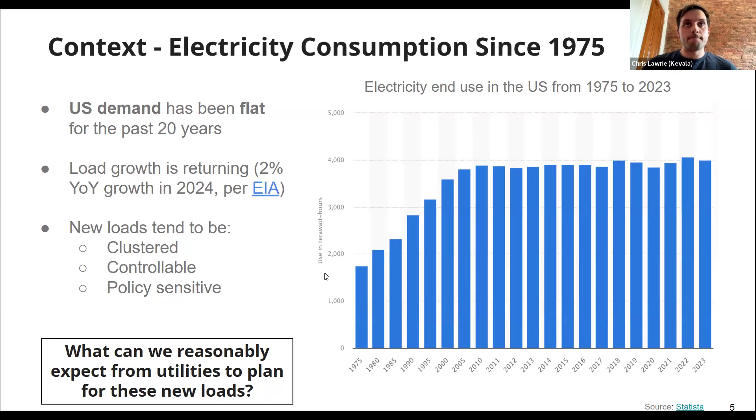Great. So yeah, DERs, what are they? Stands for distributed energy resources. It's things like solar panels, electric vehicles, energy efficiency, batteries, things like that. And DERs tend to be adopted behind the meter. They can be very, very hard for utilities to spot. And although they are small, they can be mighty. They impact all levels of grid planning, whether it be rate design all the way through integrated resource planning.

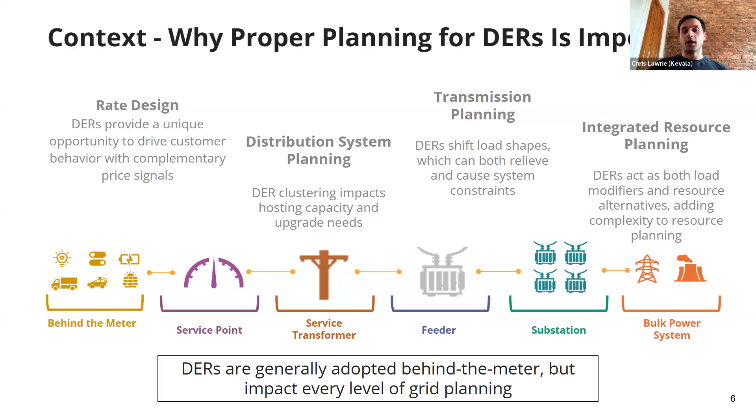And so we're at a stage now where planning is perhaps more and more important, but the forecasting has become harder and harder to do well. Next slide, please. So when talking about forecasting, it can be helpful to delineate load forecasting from DER forecasting, particularly distributed generation forecasting, as there are some important differences here. So starting with load forecasting, it's a bit of a fuzzy term. It encapsulates an awful lot of different things.

Broadly speaking, over the past few decades, load forecasts have consisted of econometric models which extend historic trends. So whether doing distribution system planning or bulk power system planning, it has been a reasonable assumption that the past is a good representation of the future. And these sorts of models have been sufficient to support decision-making. Depending on the use case, these sorts of more historic models may have had some percentage year-over-year load growth baked into them. They may have accounted for weather normalization as well. Accounting for weather is very, very common in load forecasting.

So yeah, DERs are causing large changes between the timing and the magnitude of the peak load in a system, which presents a whole host of new challenges, which we'll go through in the next couple of slides. Just to quickly talk on DER forecasting, a lot of utilities, ISOs, RTOs are starting to account for DERs explicitly in their forecasts. However, the sophistication of this modeling varies significantly depending on the available data and the technical proficiency of the people putting the forecasts together, and also varies depending on the use case.

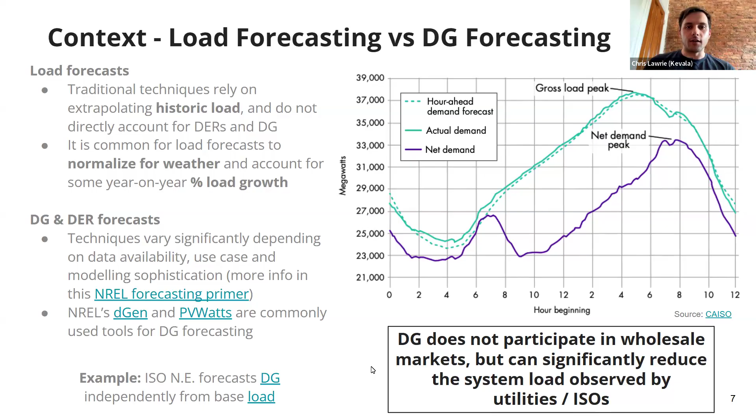Okay, next slide, please. So on to DERs. In the interest of time, we're only going to have two DERs to talk about today, EVs and heat pumps. Though there are many, many other DERs that are worthy of consideration too. So solar panels, batteries, energy efficiency, and so on.

And when forecasting DERs, we care about two things. We care about the adoptions, so where and when are they going to appear on the grid, and behavior. What is their time series load going to look like? And then from both of those, what are the things that we can do to prepare for or mitigate the worst effects of their impacts? So where and when, what will their behavior look like? And what, if anything, can we do about them? And we're going to talk about each of these two in turn. So we'll start with heat pumps. Next slide, please.

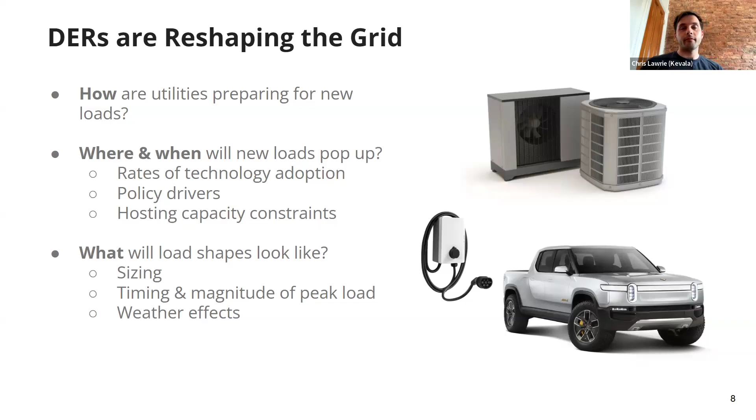And this is a good point to just pause on. Policy is a great influencer of DER adoptions. We've got at the federal level, all the way through states to local jurisdictions, all adopting sometimes very, very aggressive policies and decarbonization targets. And when working with forecasts for any DER, it's really important to ask the question, what policy scenarios have been accounted for, and how has this been converted into something that is meaningfully reflected in my models, or in the models in the work that you're working with?

So what could this look like? Different policies could show up in a number of different ways. It could impact the total quantity of a technology that's adopted. It could impact the rate at which that adoption occurs. It could affect the types of technologies that are adopted, and it could affect the distribution of those technologies and where they pop up.

And for example, here, if we were forecasting heat pumps across Colorado, let's say, we would want to make sure that we accounted for all of the policies. And an example one that's a very, very local one is the Comfort 365 program in Boulder, which provides $1,750, I think, if you replace your gas furnace with a heat pump. So this will definitely impact and influence where people decide to adopt certain numbers of heat pumps across the state.

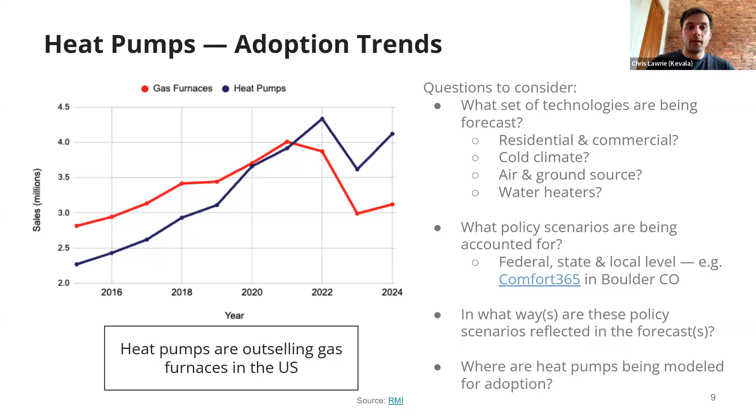And there are a few groups who've produced very, very advanced physics-based models which take literally hundreds of inputs, like building size, building materials, building usage patterns, external temperature, even things like wind speed into account. So NREL has an open source tool called ResStock and one called ComStock for residential and commercial heat pump modeling, among other building usage modeling too.

And these sorts of models are very, very computationally intensive and can be inaccessible without a strong technical background and capability within your team. So in the case that we don't have the ability to build or use one of these complex physics-based models, there are other strategies for forecasting heat pump behavior too.

One strategy I've seen before is to take gas consumption data as a proxy for heating energy usage, and then applying that to some heat pumps that may replace the gas usage. Or taking some sample profile and maybe scaling it up to a territory. But these other techniques start to come with their own issues and start introducing new errors that you need to be careful to account for.

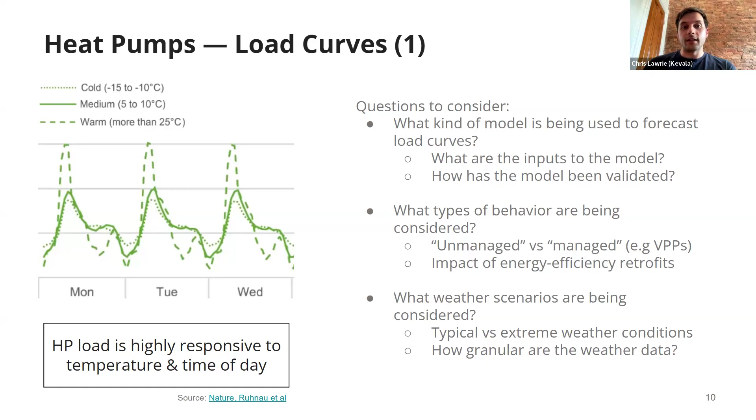And if the results in the forecasts that you're working with haven't got particularly clear points to answer those questions, that's certainly a flag that's worth investigating a little bit more closely, because as we'll see in the next slide, the implications could be huge for different technologies.

In terms of mitigating the worst effects of heat pumps, there are lots of things that we can do. Energy efficiency retrofits are some of the lowest hanging fruit, and I'm a big proponent for energy efficiency. There's a lot of excitement around virtual power plants, but they have their own issues. And again, if people are interested, we can talk more about those afterwards.

But again, if we're going to then start modeling heat pumps and then modeling mitigation strategies, perhaps to investigate NWAs, non-wires alternatives, on top of that, that introduces a lot of additional complexity to the model, introduces new sources of error, and is something we need to be very, very careful about doing properly.

We also need to take into account not just things like energy efficiency and VPPs, we need to take into account different weather scenarios. And as we've got a changing climate and changing weather, we're seeing extreme weather events happen with a greater and greater frequency.

And if you, can we go to the next slide as well, please?

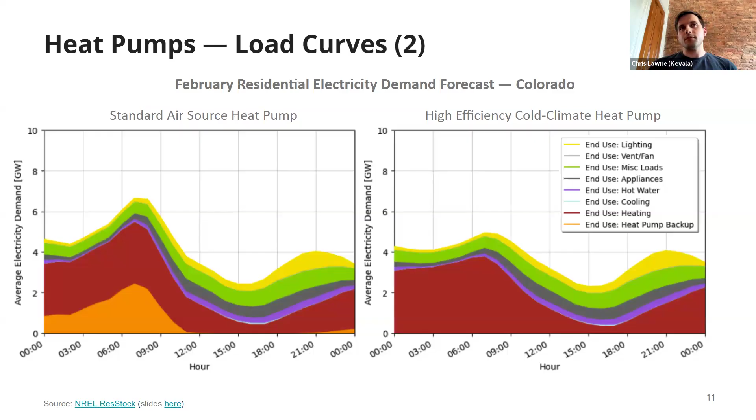We're seeing consistently, not just across the studies we've done at Kevala, but other research groups too, that heat pump adoptions into the future have the capability of shifting the system-wide peak from typically summer to winter, which has enormous implications for grid planning and gas planning as well.

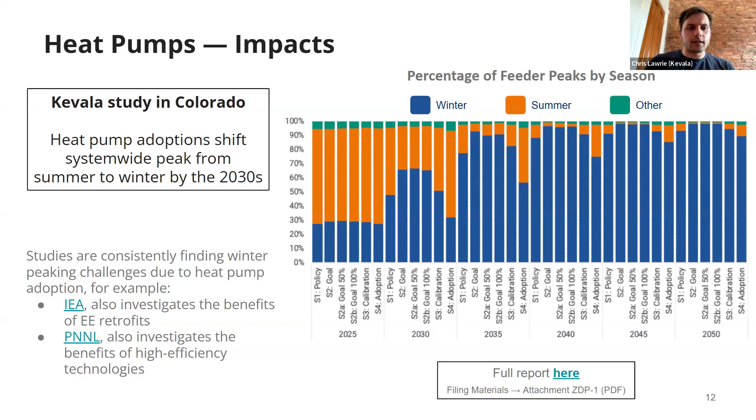Okay, I think that's it for heat pumps. So is the next slide EVs? Yeah, great. Okay, so we'll go into EVs now.

Just like with heat pumps, we've seen a dramatic uptake in the number of electric vehicles adopted in the US. In 2024, 1 in 10 light-duty vehicles sold in the US came with some sort of a plug. But it's worth noting that the adoption trends for electric vehicles are very, very uneven. The bulk of adoptions are happening on the coasts and a few other pockets across the US.

And just to put a number on it, we have about 4.5 million electric vehicles on the road at the moment in the US, out of a total population of vehicles of about 280 million. So very, very much in the early days of adoption still. Some estimates think that we'll have closer to 100 million EVs by the mid-2030s. So maybe at the start of this big hockey stick, and that introduces a lot of complexity.

And this is a problem for no other reason than the electric grid was simply never designed to be the fuel source for transportation in the US. And it's worth also noting that this trend is not just isolated to light-duty vehicles, but also trucking and buses. So Amazon has started electrifying their fleets of delivery vehicles. School buses are going electric as well. Oakland recently electrified, I think, all of the school buses in the region with vehicle-to-grid integration.

And there's a challenge that's unique to EVs. It's not just the load growth itself, but the mobility of this load growth. So it's one thing to forecast that existing customers are going to consume more electricity. It's another challenge entirely to forecast what this load will look like and when and where it appears, particularly if that load is movable. And forecasters and regulators have historically thought of EVs in terms of the total number of vehicles that are going to be adopted. And we need to start thinking in terms of charges and thinking in terms of profiles.

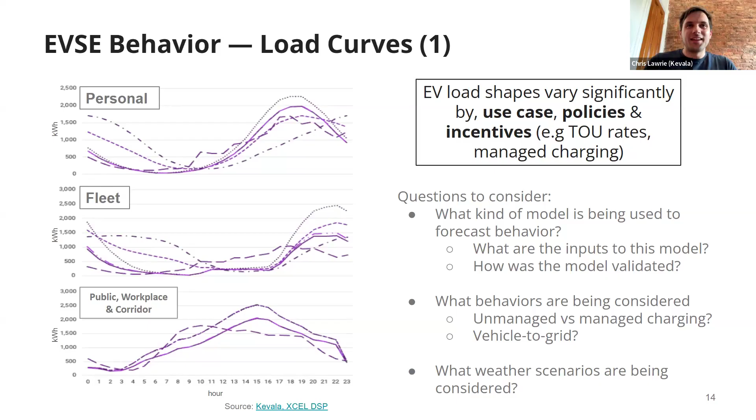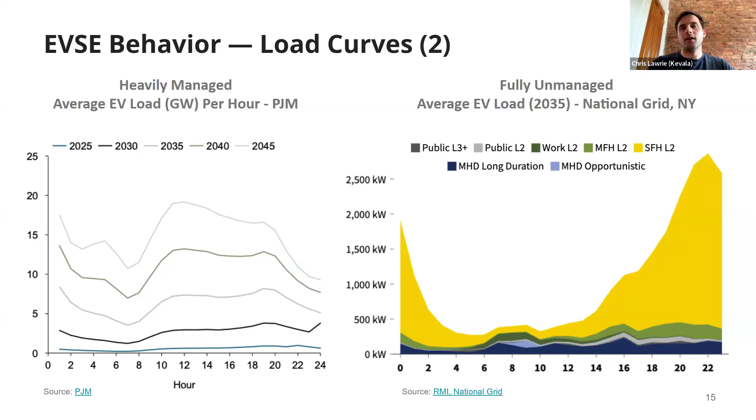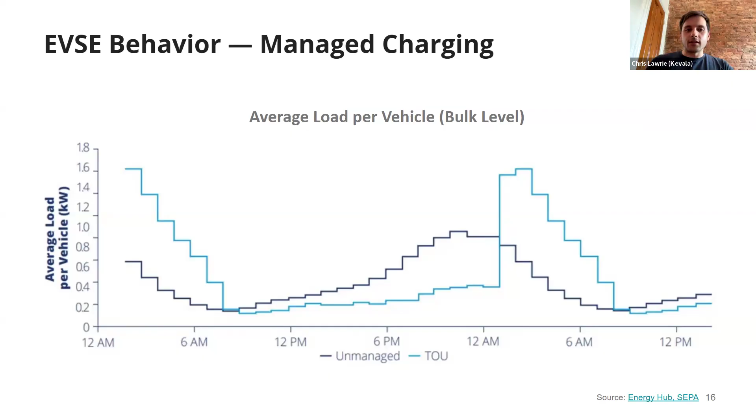This is largely because it needs to keep the cabin that the person is driving in at a comfortable temperature, and it also needs to do some heating on the battery too. And taking this into account can really change the results of the forecast. And as I say, it's not common that people explicitly account for temperature with EV forecasts.

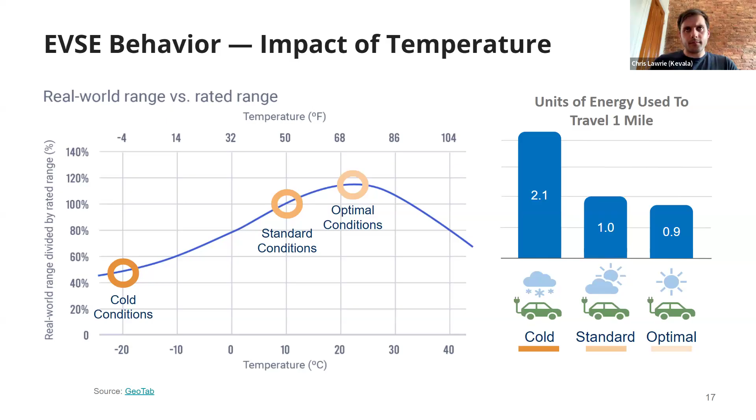Okay, so 2 minutes left. Next slide, please. I've prepared 3 pillars of sort of best practices for DER planning. I'm sure that we could come up with 10 pillars, but I think that these are the 3 core pieces that if you take away anything, this is what I'd like you to take.